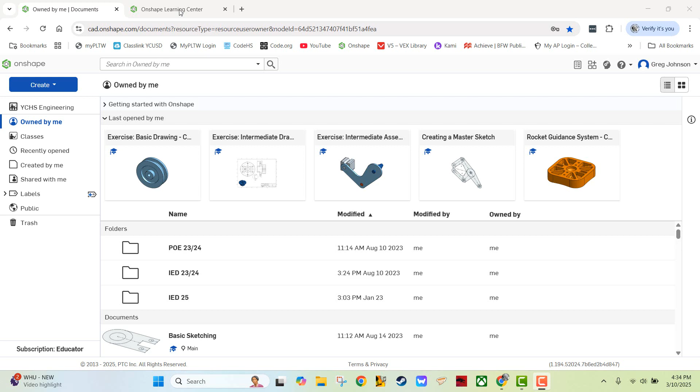First I'm at my Onshape Learning Center and I'm going to go into the new to Onshape pathway. We're going to scroll all the way down to multi-part studios and hit continue.

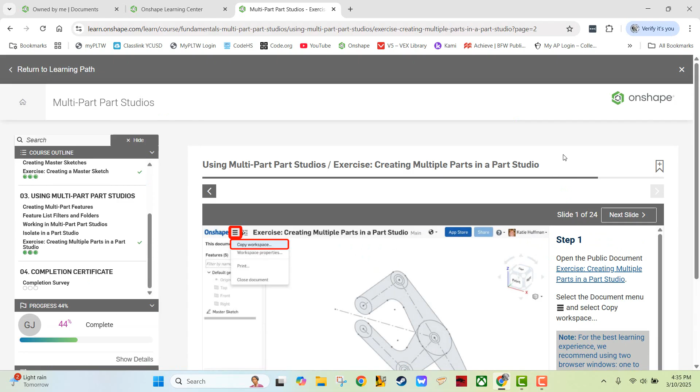This is the exercise we're going to do, under section 3, creating multiple parts in a part studio. This is the thing we're going to be creating from a master sketch, the same one made in the last exercise. I'm going to hit the next page arrow, and you can see we've got this master sketch. Before we had to make that from scratch, but this time we're going to click on this link and it will magically appear.

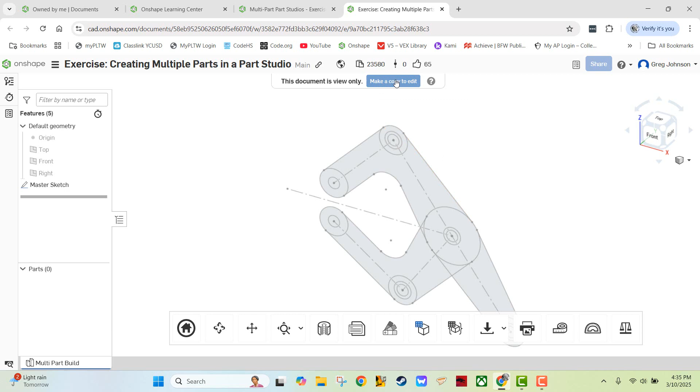Okay, you saw me click the link. Where is it? There we go. Now I have to click make a copy to edit, and I'm going to click on, in my case, owned by me, and make a copy there.

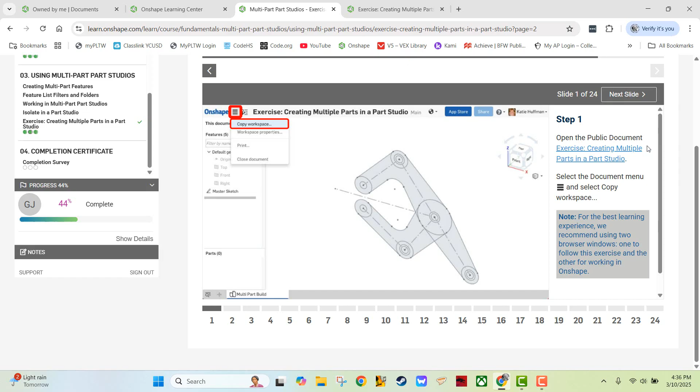Here is that sketch, exactly the same as the one we did before. The idea is this sketch represents a profile for many parts, and we are going to create those parts now. It's all about extrudes and other things like that. Let's go back to our instructions and go on to the next slide.

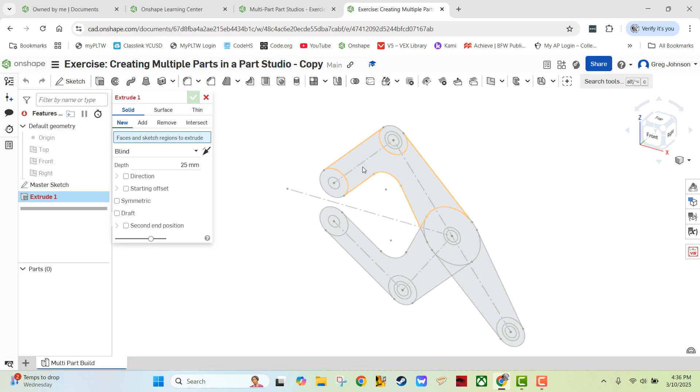The first thing we're going to do is extrude what's called the large arm 5 millimeters in the direction towards us. Looking at it this way, I'm going to hit extrude and start selecting things. I like to select things in order, so I'm going to click here, click here, click here.

Here's a thing that gets a lot of people in trouble. You see how there's kind of a bullseye look in here? We need to get that one in there too, since we need those holes to all be the same size. It might be a good idea to click that first because it's easier to get at. I'm going to keep doing that one, and that one. If you notice we're missing a couple little slivers here, so we better get those.

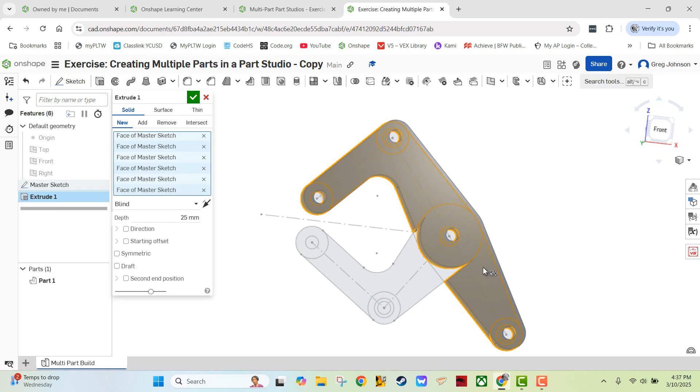Now we got our part. That's way too big, it was supposed to be 5 millimeters, so I'm going to type 5, and there we go. That is our part. The arrow is pointing towards us, and that's what we want, so let's go ahead and accept that.

Now it says rename the part in the parts list large arm. So I'm going to right click, rename it large arm. This process is important because you're going to be creating quite a few parts, and you don't want to have part 1, part 2, part 3, part 4 - that kind of thing will get very confusing. Calling it the large arm, which is what it looks like, is the helpful thing to do.

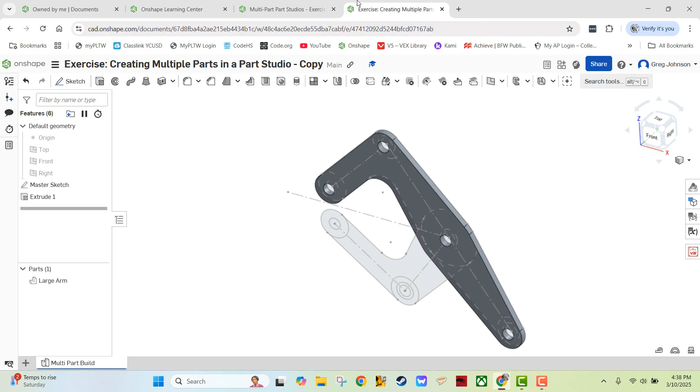Let's go on to the next part. Slide 3 says show the master sketch so we can see it for making additional parts. In this case, it didn't hide the master sketch when we did that, so we don't really have to do that. I'm not sure why sometimes it does and sometimes it doesn't, but in this case it did not hide the sketch, so we don't need to do that.

Let's move on to slide 4. Now we're going to flip it around and create a second part, also 5 millimeters, coming in the other direction. So it's important that I turn it around and make it so I can see it, coming towards me again. I'm going to hit extrude.

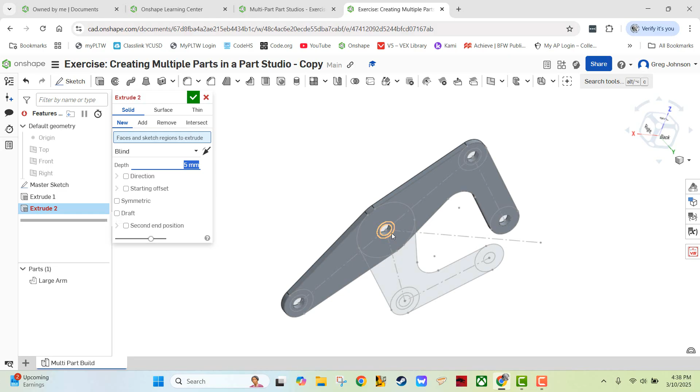This time I'm going to select the 5 millimeters first, then start clicking on things like before. Again we want that inner ring right there, so I'm going to click that first. You notice it's going in the wrong direction, so I'm going to click the arrow to change that, and then start moving my way out.

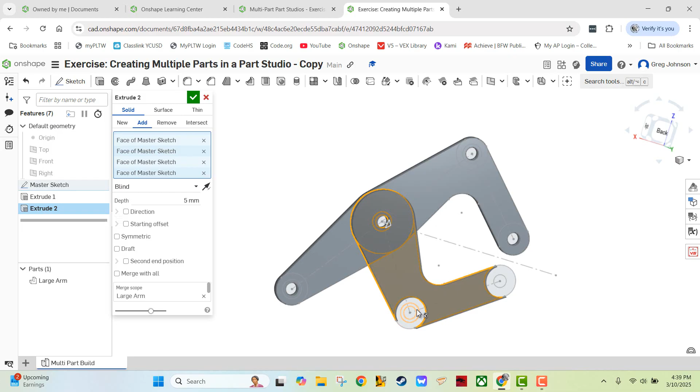Now you notice I missed a little part here, and it's giving me some grief. I'm not sure why at this point. Well, there you go, grief gone. These things can be a little funny sometimes, depending on the order of operations. But if you keep at it, things will work out.

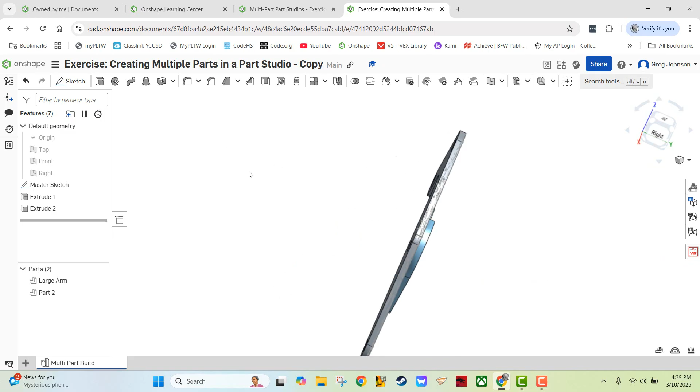Now see how it says add here? It's going to add this to this part. We don't want that, we want this to be a new separate part. So we're clicking new, and we're going to accept it. You notice it made it a different color - every time you make a new part, it will auto-select a new color for it. And there you go.

Now let's go on to the next slide. We are going to make a sketch on the plane that basically sandwiched in between the two parts.

So on the large arm right here, oh, that reminds me, I missed something. We need to go back and rename this part to small arm. There, whoop, small arm. There we go. Okay, got ahead of myself.

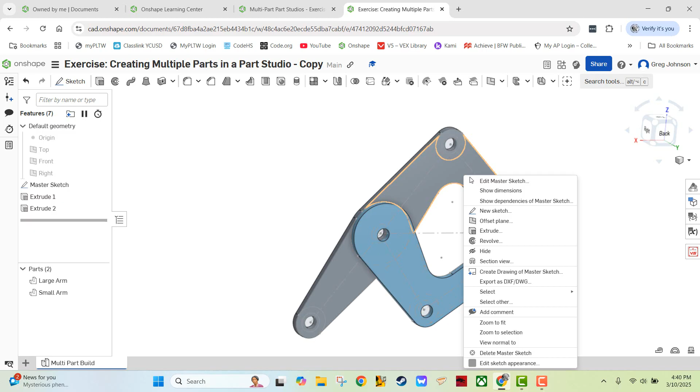Okay, so let's make that sketch plane. I'm going to hover over that surface, right click, and hit new sketch. So now I have a new sketch that's kind of in between the two.

All right, what do they want us to do? They said hide the master sketch. Okay, well, we can do that. And by the way, sometimes things will just start to get in the way. I'm going to hide that master sketch, just for clarity. It's not going to hurt anything at this point, and you notice the sketch has been renamed large arm grip sketch.

I'm going to do that right now. I'm going to click the little pencil, large arm grip sketch. Okay, so let's see what they want us to make.

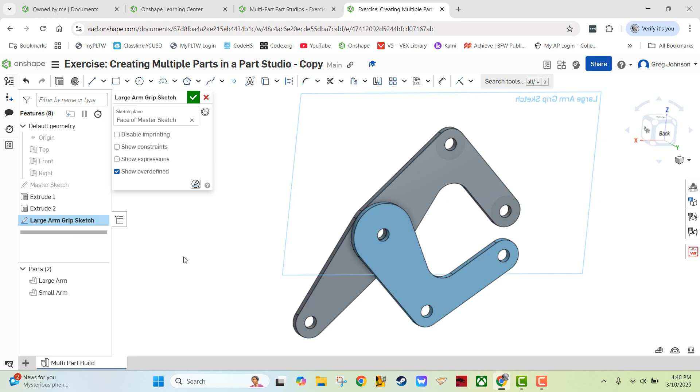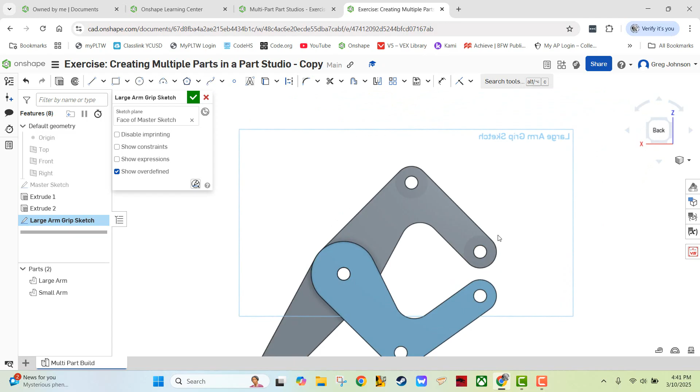So I'm going to go back to my part, and I'm going to hit N so I'm looking in on it. By the way, if you hover over a certain part of the drawing as you're zooming in and out, it will actually focus on that part. If I hover over here, it focuses more on that portion of it. And that's cool, because that's what I want to do.

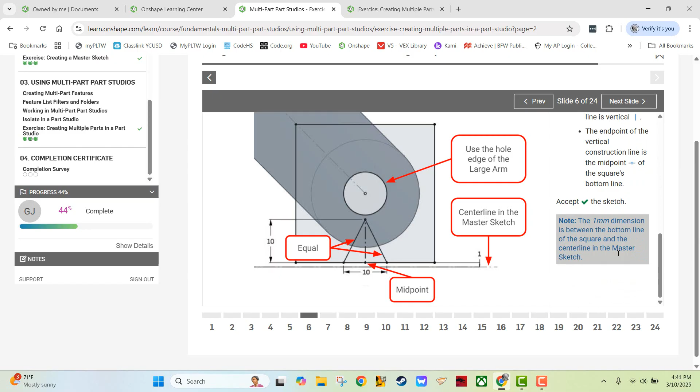One of the things I actually realized is I don't think hiding the master sketch actually makes sense. I don't know, we'll see, because we're going to need that line. So I'm going to unhide the master sketch because we need this line right here in our sketch. So I think they kind of goofed it a bit, but that's okay.

Okay, so the first thing we're going to do is make a center rectangle starting from here and going out. Then we're going to make some lines. And they want us to project this circle into it. That's what the project is. Use the hole edge of the large arm. Centerline in the master sketch. These lines are equal, that's a midpoint. And you notice that's a construction line, and we got a couple dimensions.

And then this dimension. So let's start off by making that center line. Center point rectangle. And I'm going to click and drag it out, so it's approximately what we want.

Okay, now I'm going to go back, I want to see something here. The sides of the rectangle are equal. Yeah, we want this to be a square. And for it to be a square, all four sides need to be equal. Now, in a rectangle, every opposite side is already equal.

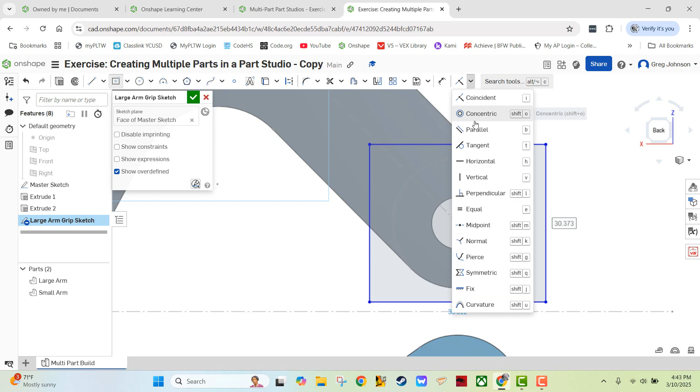So we only need to make equal, say, the top and one of the sides. And then that will form it into a square. Now, if I want that square to go black, this is the key dimension right here, this 1 millimeter dimension from the center line.

So I'm going to get my dimension tool, click here and here, go out and make that 1. And you notice it went black.

Okay, so now I'm going to create this center structure. It's just a triangle that's 10 wide and 10 tall. Okay, and let's go ahead and let's do that.

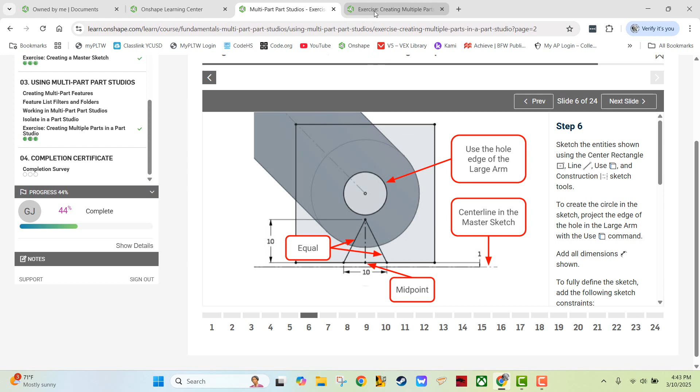So I'm going to start with the line. Now, by the way, they said they want this center line to come up as a midpoint. Well, you're going to notice it's also straight down from there. There's multiple ways we could do this. I'm going to click to start the line, and you notice when I get here, I'm creating a vertical constraint. I actually want that, so I'll click that, come back down here, and double click and end it.

Then I'm going to turn it into a construction line, start right here and go straight down. And if you notice, it lines up with the midpoint, so I didn't need to add the midpoint constraint afterwards. That's what I got by lining up with that point that's the center of that circle. Now I also need to project in that circle right there.

Oops, I made it into an accidental construction line. Is that the end of the world? No, because I'm going to hit escape to get out of my tools. I'm going to highlight my construction line and deconstruct it. And there you go. Remember, nothing is a fatal error. You don't always have to be hitting the undo command. You can actually just fix it.

Okay, so how am I going to make this thing look like it's supposed to and make it black? Well, first let's add some dimensions. So from here to here is supposed to be 10. And this line is supposed to be 10.

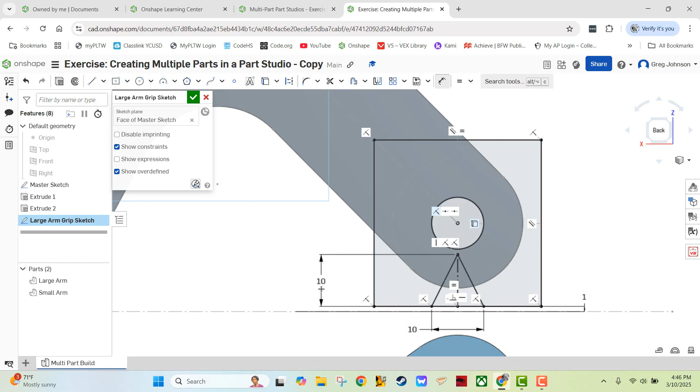I'm going to click that and delete that. Okay, we do not want that line tangent to that circle. But what we do want is for this line to be 10. Now we got what we want. Okay, so see, even I make accidental constraints at times.

So there it is. Okay, so that's the sketch we want, the large arm grip sketch. I'm going to accept that. Now we're going to go back to our instructions, and we're going to go on to the next slide.

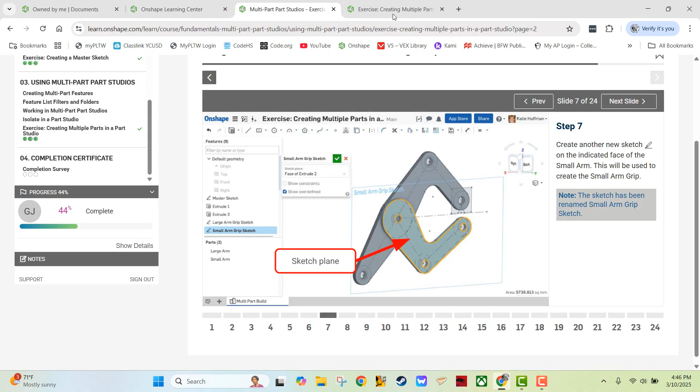Okay, this time we're going to make another sketch, but instead of making it on that sketch plane that was the face of the large arm, we're going to make it on the near face of the small arm. So we're going to create another sketch. I'm going to zoom out a little bit, and drag this over so I can see a little better what I've got. I'm going to hover over the near face of the small arm, right click, and say new sketch.

Okay, so what is this sketch? Well, let's see. Oh, rename it small arm grip sketch. We can do that. Let's do it right now. Small arm grip sketch. All right.

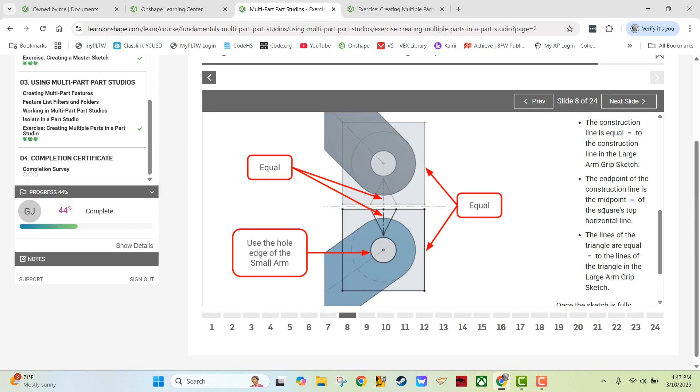Next slide. Oh, look, it's a mirror image of the other one. That's kind of fun. Okay, to create the circle, we're going to project it, and we can actually... that's funny. They're kind of doing it in a way that I consider to be not necessary. We could do this so much easier than they're describing it.

You know how? Because we know about the mirror function in the sketch. I'm just going to go, well, first I am going to, well, no, I'm just going to use the mirror function. I click mirror, I click my mirror line. Oh, okay, never mind. I thought I was going to be able to pull things from another sketch. Well, that just goes to show you that sometimes I don't even know what I'm talking about.

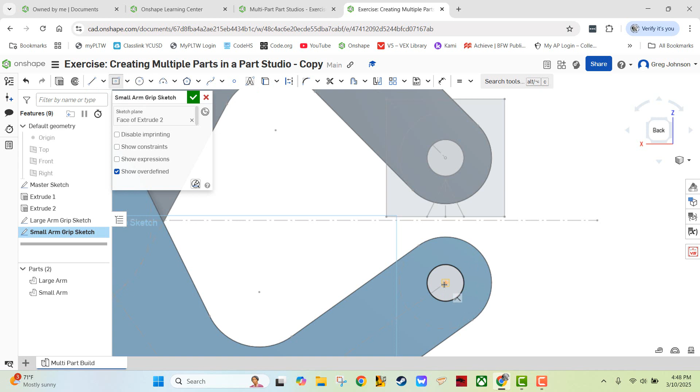That seemed like a cool thing to do, but apparently we're not going to do that. Okay, fine. We'll do it the other way. We'll click the use, we'll pull that in, we'll get our center point rectangle. Now I am going to do something. Well, let's see if I drag this out here, if I can reference that point. I really can't reference that point.

Okay, fine. So we'll click it. And I thought maybe I could reference that and do a vertical constraint, an automatic vertical constraint, but I could not. But it does say we can add an equal, which that's just kind of interesting. So I can do an equal constraint between those two and these two, and that pulls it in.

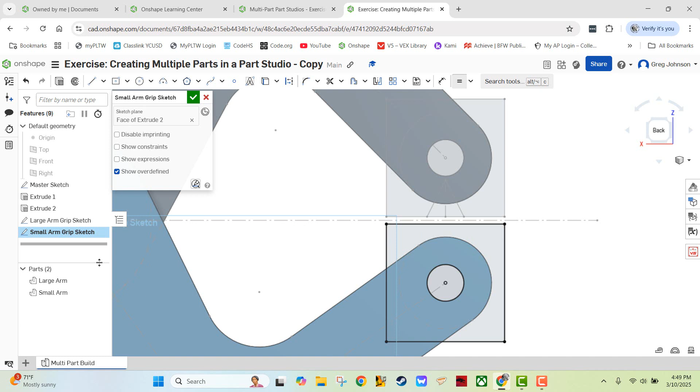Okay, so interesting. Okay, so by the way, I'm going to hide the large arm just so we can see that sketch a little better. And I'm actually going to hide the master sketch too, because this is just going to make my life a little bit easier in mimicking the other one.

So I'm going to get my line tool. I'm going to click, and again, see how I create, look at it. If I click right then, I'd get a perpendicular to that other line. Do not want that. I don't want yellow. I really don't. Now, I don't mind actually that coming down from coming straight up from that center point, because that's actually helpful, but I don't want to keep going till more yellow starts.

See how that happened? Don't want that. So I'm going to click, come back here, double click, and now I'm going to turn on the construction tool. I'm going to start here, go straight down, double click, and finish that. And if I make this and this equal, look how that squared that away.

Now I believe I just need to do, I wonder if it'll allow me to do a vertical between that point and that point. Yep, see how that locked it in. Okay, so you can do constraints. What apparently you cannot do is do mirrors between two sketches. So that's cool, now we have our small arm grip sketch.

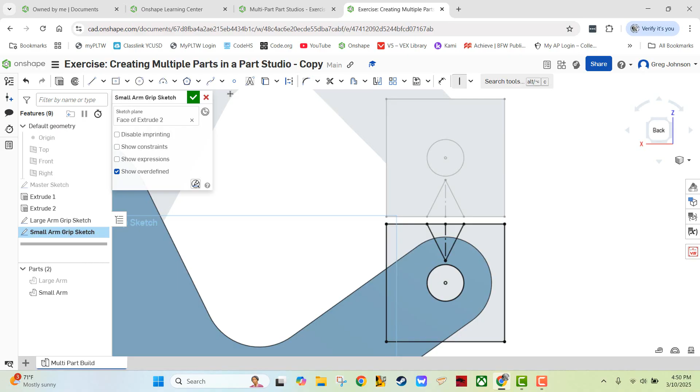Let's accept that and move on. Next slide. Okay, we're going to flip this around and we're going to create a plane. Okay, so let's go back here. By the way, the easy way to flip it around is to go and tell it we want an isometric view. Notice that? Oh, probably should bring large arm back too. There we go. And we're actually going to hide these two sketches. We don't really need to see them right now, and we can always bring them back.

And we are going to create a plane that we are going to name the mid plane. We're going to offset it 25 millimeters from the near face of the large arm. So let's do that. We're going to get the plane tool. Where are you? There you are. Entities. I'm going to go from here.

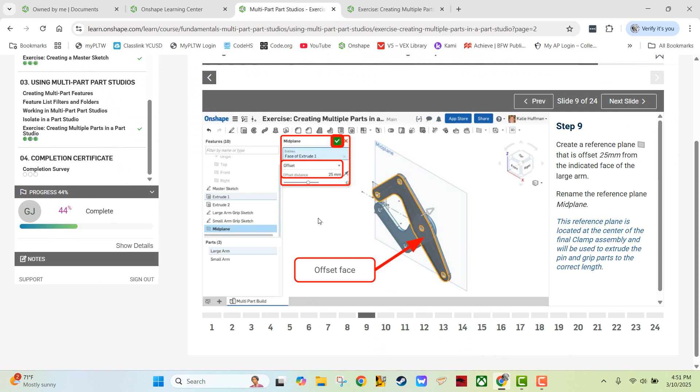And by the way, even though it's called midplane, we actually want an offset plane. Offset just means I'm going to pick a plane, and I'm going to make a plane that is perfectly parallel to that plane, and then offset by a certain amount. Now, if you notice, the arrow is pointing in the wrong direction, so I'm going to flip the arrow, and I do believe it was 25 millimeters. Yep, so we got exactly what we wanted, except we're supposed to name it midplane. So let's do that. Midplane. And we got the plane we want.

What's next? Some more extrusions. Now these ones are a little complicated. What we're going to do is we're going to create some pins. And in order to do these, we were going to use the master sketch. So we got to be able to make sure we can see the master sketch.

And then we've got two extrusions actually. We're going to go, because the master sketch is on the back side of the large arm, we're going to extrude in one direction out to our midplane. And then we're going to also extrude back in a second direction. See these double arrows there? That indicates the second direction back up to this face.

Okay, now it's confusing because what it looks like right here is that you're only extruding that ring. It's not true, we want to actually extrude the inside too. You can't tell that by looking at that, but we want to make a solid. If you look over here, it's solid in the middle, which means we have to accept all of that. So we're creating new parts.

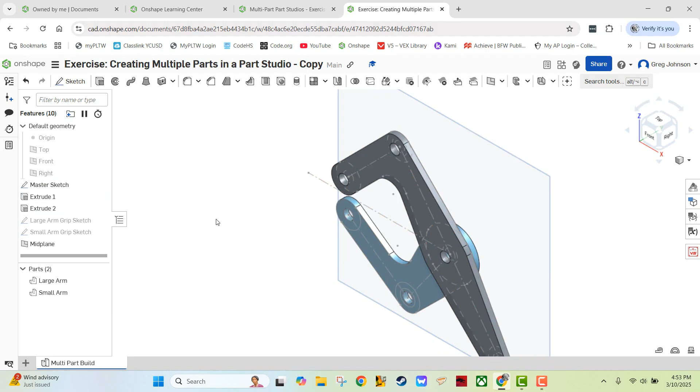We're going to select those four faces. We're going to make the first face up to the midplane and the second face up to this face. Now let's go do that. Now, one of the things that is true when we bring that master sketch back is that it's hard to see where we're supposed to click. So what I'm going to do is temporarily hide the large arm.

And then I'm going to hit the extrude, and I'm going to extrude here and here. And if you notice, they're in the wrong direction. I'm going to go the opposite direction, change it from blind up to face, and select the midplane. Now I'm going to click over here and here. And why is it being a jerk?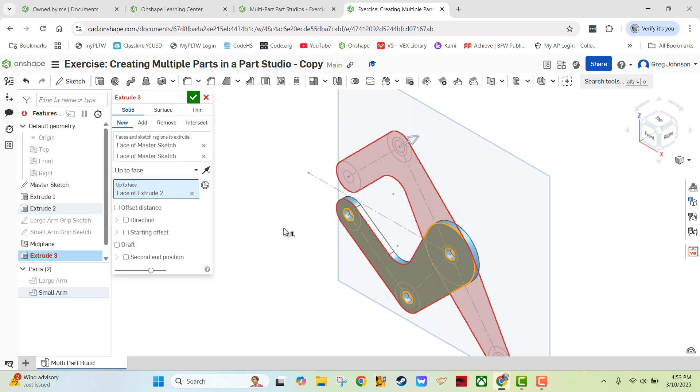Okay, my bad, that was terrible. I should have selected everything before I did that. Let's go back to here and select those other two. We were not focused on the same spot. Now I'm going to do up to face there, and then you can see that we've got what we want.

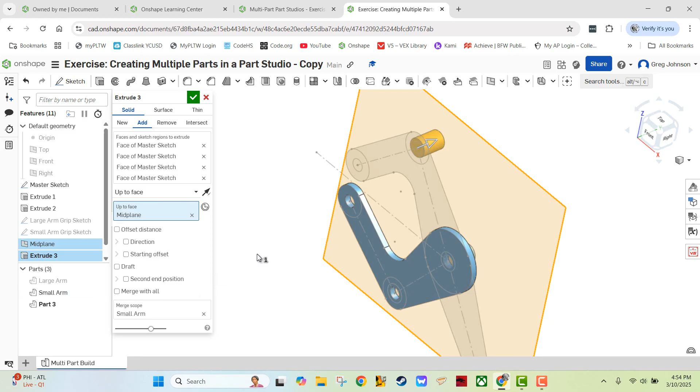Now the weird thing is, because of the existence of this part here, it almost looks like it did something different. As a matter of fact, we can't even see it, but don't worry about that, we're doing fine. But we are going to select the second end position, it's also going to be up to face. And if you notice, the arrow's pointing in the right direction. Now, what face is it up to? Well, I got to unhide my large arm now because it's up to this face. Okay? And that's exactly what we want. We're going to accept that.

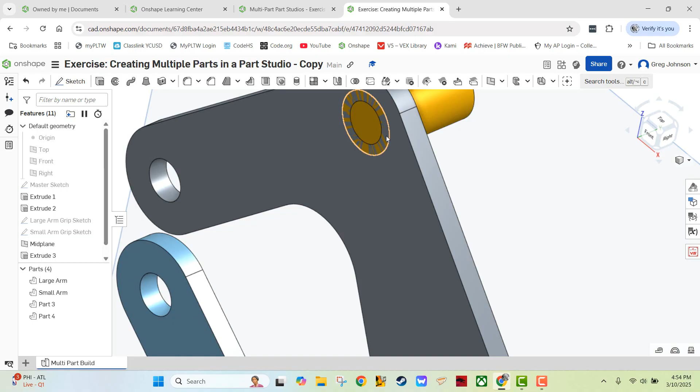Now I'm going to hide the master sketch again so we can make it look like it's supposed to look, which is, well, they kind of show it over here, but that's what it's supposed to look like. One of the things you might notice is there's some weird yellow and gray mix here. We actually extruded this part through the other part. That doesn't sound like something we want, and we are going to correct that later. So if you're worried about that, don't worry about it, we are going to fix that. But for now, it does look kind of weird, because it is.

Okay, so what are we doing next? Next, we'll use the master sketch to create the 3 different pins. Wait, is that what we already did? That is what we already did. I'm sorry, we're on step 11. To model the 3rd pin, this one down here, we're going to create a new extrude feature.

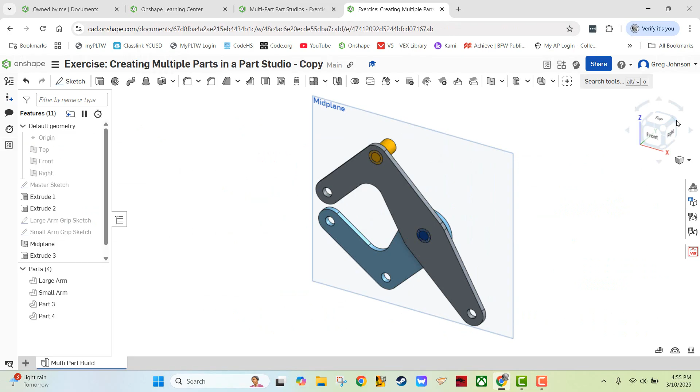We're going to select the medium circles, basically the same 2 circles we had before. And we are also going to extrude it out to the midplane, but we are going to flip it around. We want to look at it from the different side. So I'm going to flip it around, and I'm going to zoom in down here.

And I need to unhide the master sketch because I need that. Now again, the problem is the master sketch is on the other side of this part. I'm going to hide that. I'm going to start my extrude, and again, I'm going to click add first so I don't forget. And I'm going to select those 2 things that I need. And they're pointed in the wrong direction, so I'm going to click the arrow to make it go in the other direction. Change it from blind to up to face.

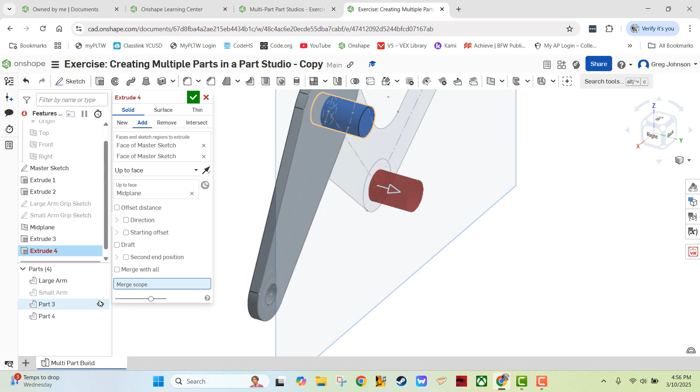And then I'm going to select my plane again. And I'm going to unhide my small arm again. Whoops, oh, I'm sorry, I didn't mean to click that, I meant to click the eye. There we go, there we go. Oh my goodness, we got that. And merge scope, it is not add. See, when I did that, it changed it back to add. It has to be new, we want a new part.

Okay, and let's make sure that's all we need to do. Pretty sure that's all we needed to do. And that's it, we're going to call that the small arm pin. That tells me that I probably should have renamed parts 3 and 4 something else, so we'll go back and figure that out. Let's name that small arm pin. Actually, we don't need to rename the extrude. Let's make that extrude 4 again. We need to name the part.

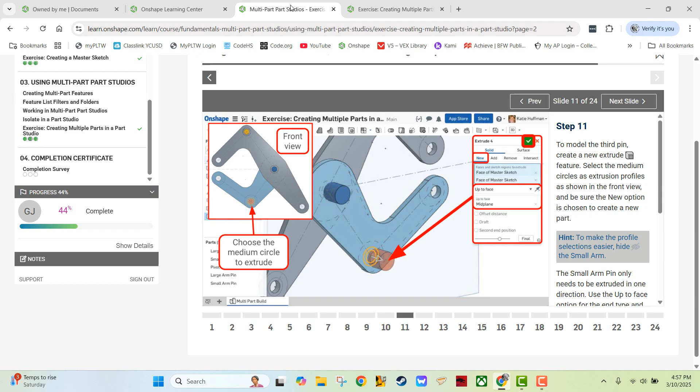Okay, so we're going to accept that. This is the small arm pin, rename it. And what were those other ones supposed to be called? Pivot arm pin, I think. Well, let's go back where we can actually see that. Boy, they're hiding it pretty good. They hid it, let's see. They're going to tell us what it's called down here somewhere.

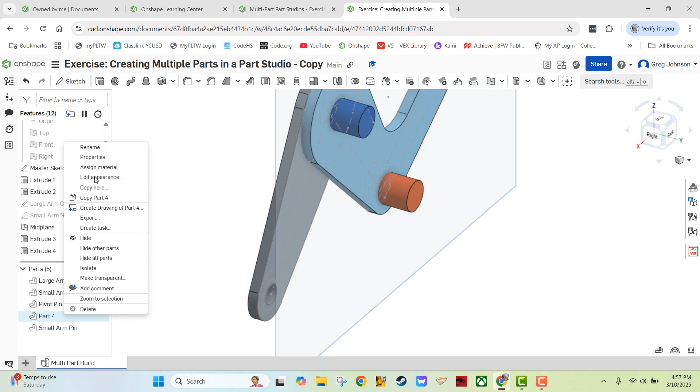Okay, large arm pin and pivot pin. There we go. So part 3 is the pivot pin, because it's where the thing pivots. Right click, rename pivot pin. And right click, rename large arm pin. Okay, now we got everything looking the way we want it.

Okay, let's fast forward, so we did step back a little bit. This is where we're going to fix that issue that we had before, where we extruded right through the middle of the parts. So we're going to do this thing called a Boolean. If you want a little background on this, Boolean is basically the words and, or, and a couple others, but and/or is good enough for us now. When we can basically cause parts to take away from other parts.

So what we're going to do, the way I'm going to explain this, is we are going to subtract from the large arm pin, the small pivot pin, and the small arm pin, everywhere they intersect with the large arm and the small arm. So that's what the tools are, those are the things that are going to cause the subtraction to happen. So it's kind of an and - anywhere that these things and these things run together is going to get subtracted. And keep tools, yes, because we don't want those 2 arms to disappear. Okay, so let's go and try to do this.

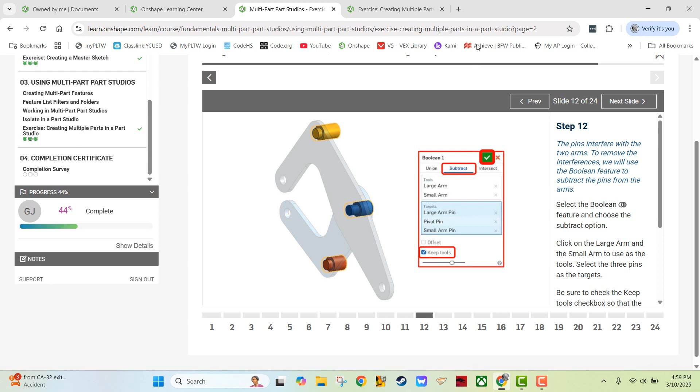So first of all, I'm going to hide the master sketch. I'm going to right click and flip back around to my isometric. I'm going to hide the midplane too, I don't want to see any of that stuff just for now. Zoom in a little bit, and let's get the Boolean feature. Here it is, it looks like one of those Venn diagrams.

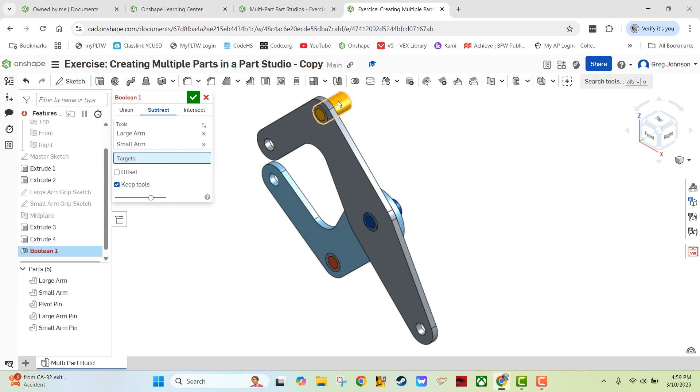Make it subtract. Now the tools, these are the things that they're going to intersect with, and that's the large arm and the small arm. The targets, the things we're going to subtract from: this pin, and this pin. And you notice - oh wait, what happened?

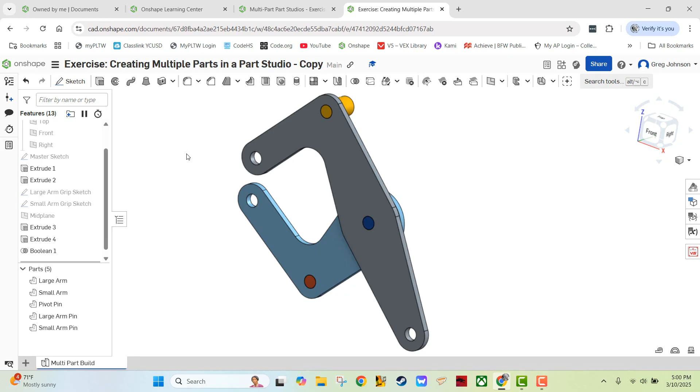There we go, I don't know why it didn't take. Okay, and you notice our little funky things disappeared. So when I click that, look at that. Now if you were to hide the arms, look what it did to the pins - it took off the intersection between the pins and the arms. Pretty cool.

Now we're going to create our grips, and the grips are going to be created from those 2 sketches we made. If you notice, these are also new parts. We're also going to extrude them up to the midplane. So let's go ahead and do that.

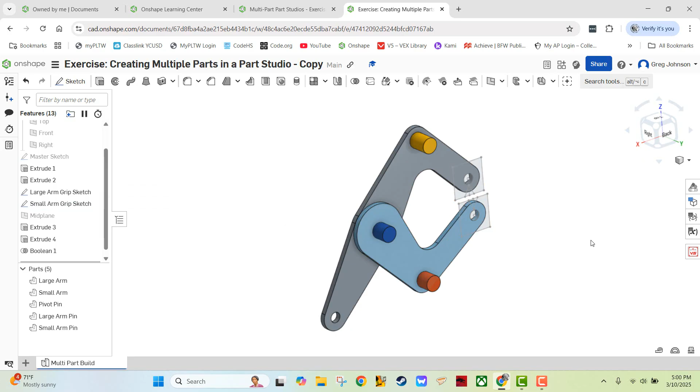By the way, there's a lot of different things you have to select to make that happen. So let's go back here, let's flip it around so we're looking at the back side again. I'm going to hover it a little bit more. Now we need to bring those sketches back so we can see what we're actually extruding, and I'm going to zoom in on it a bit. We're also going to need to bring back the midplane because that's what we're extruding up to.

Now I'm going to show you, there are some very common issues that happen when doing this, and we're going to show you how to avoid those. So we're going to do an extrude, keep it as new. We're going to say up to face, and the face is going to be this plane here.

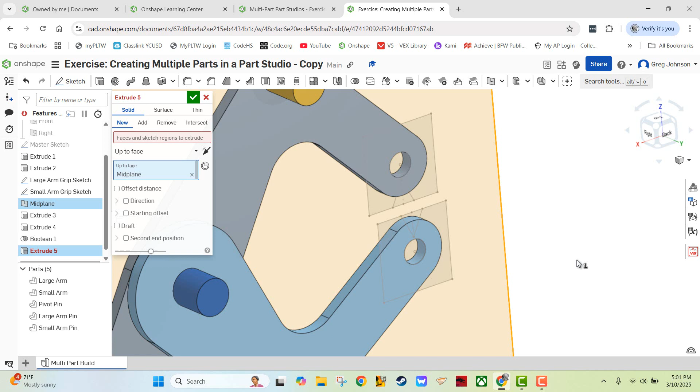Okay, now what are we going to actually extrude? We're going to extrude that, and the center hole - oh darn it. I see, that's the problem, I did it in the wrong order. Let's do that center hole first. And it flipped it around, so we're going to unflip it.

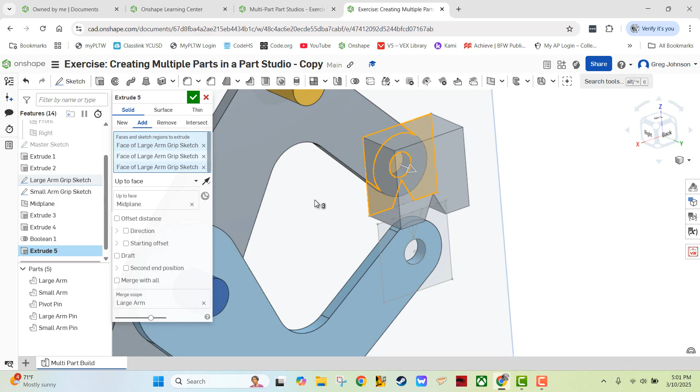Now you got to get 3 different things, okay, including the center hole. The mistake that a lot of people make is they don't include the hole. So let's start with the hole again, and then get all the little parts that add up. In this case, we had to do 4, so a total of 7 things. Everything else looks good - they are new parts, and we accept them.

Now, you may notice they're not the same color. Doesn't matter, doesn't matter. I don't know what the protocol is for what color it chooses to make things when it makes new parts, but it's definitely not any colors that already exist - it seems rather random to me. Not a big deal. Okay.

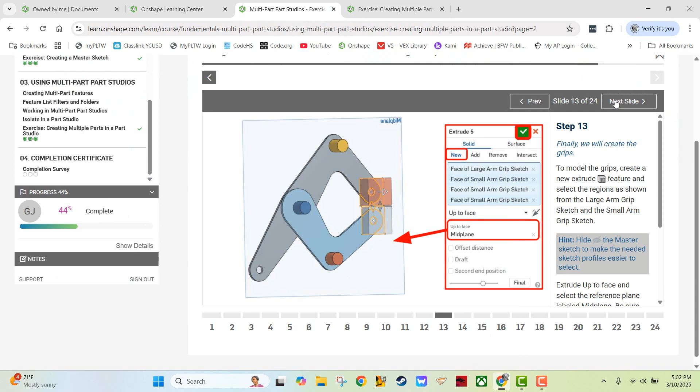What's next? Well, you know how we had pins in the other, and we had little extensions of the pins that stick into the arms. We're going to do the same thing here, but with separate extrudes. Part of that is because these sketches don't appear on the same plane - or actually they appear on the same plane, but they don't extrude to the same face. This pin here is going to be shorter than the other one because it doesn't have to go through as much. So anyways, let's go ahead and do this.

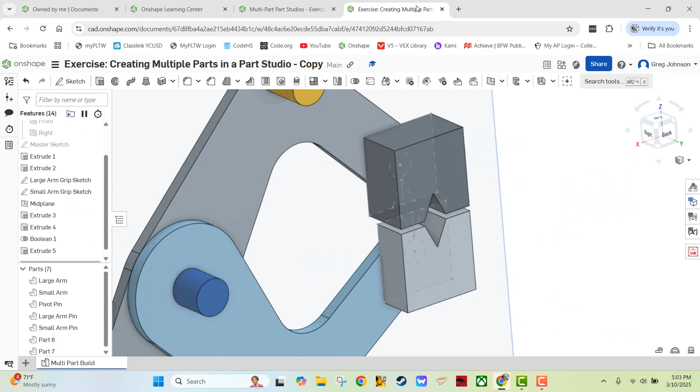This time we are adding it - we're adding it to the grip that we have, and we're going to do up to face, which is, in this case, the back side of the large arm. So let's flip this around, and I can easily do that by right-clicking and hitting isometric. I'm going to zoom and drag in over here.

I'm going to hide these sketches because we really - well, no, actually we kind of need those. Don't listen to me, we're probably going to need those. So I'm going to get an extrude, I'm going to make an add, and I'm going to see if I can click that circle in the center. Yep. And then I'm going to do up to face, and I'm going to click the face, which is this. And there it is, okay.

And it doesn't show it, and that's unfortunate. Well, I think it's because it says, what do we want to merge it to? That's what the merge scope is. I want it to merge to that thing. Okay, but it still doesn't show it. Okay, don't ask me why.

Oh, and I can already see I did a boo-boo again. That's okay, I'm going to accept extrude. What was the boo-boo? I didn't rename these. So this is the large arm grip, and that's the small arm grip. So let's rename those.

Large arm grip. Right click, rename: small arm grip. Okay.

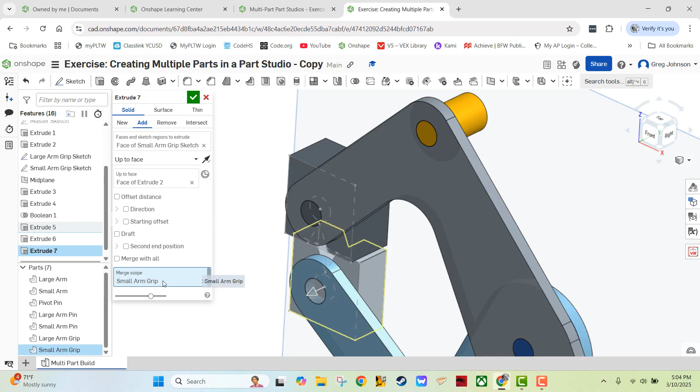Now we're going to do the same thing for the bottom grip, or the small arm grip. I'm going to click right there. It's going in the wrong direction, so I'll correct that by clicking the arrow. We're going up to this face, and we're going to merge it with the small arm grip, which is what we wanted. I don't know why I didn't do it the other time, but sometimes this thing's a mystery to me. And there we go.

Okay, so let's do an isometric view to see what we have so far. Looking pretty cool. What happens next?

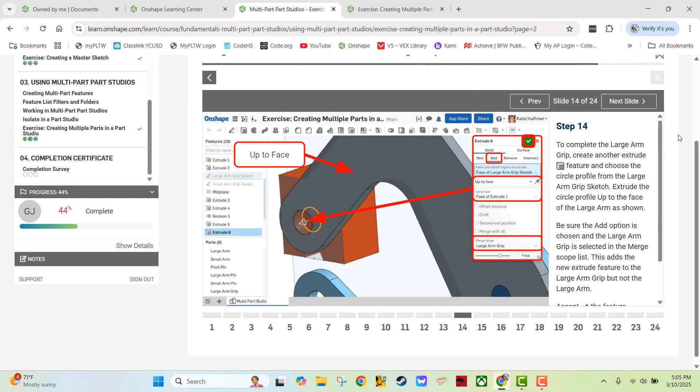Okay, this is me jumping ahead. We already did slide 15. We're going to flip it around and do a part mirror.

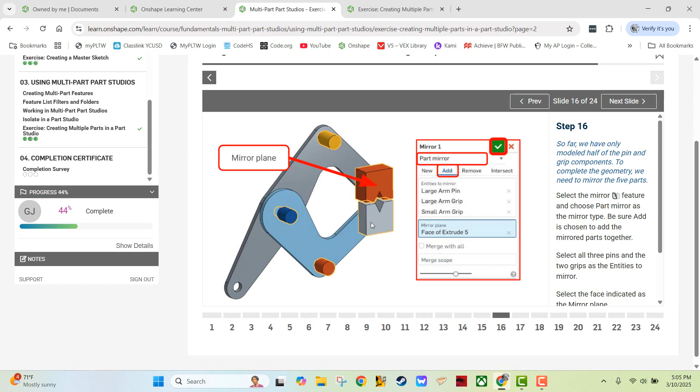We're going to mirror all 3 pins and both grips, and we're going to add them because we're adding the mirror to the existing parts. The mirror plane is going to be the face of this extrude. By the way, we could have done the face of any of these and it would have done the same thing. Very important though, part mirror.

So let's go back and rotate it a bit so we can see what we're looking at. By the way, we can hide the midplane at this point. So we are going to mirror. It's already on part mirror, that's good, but we do have to make it add.

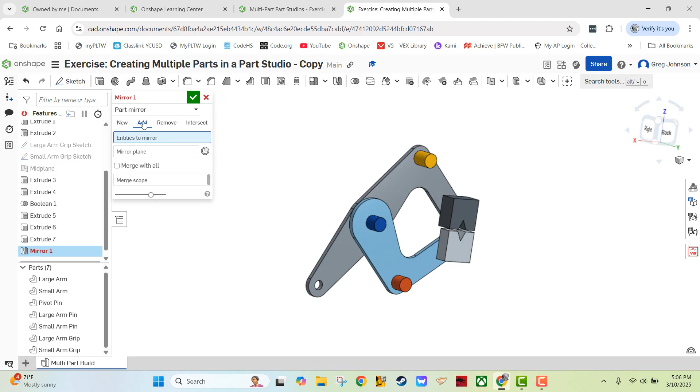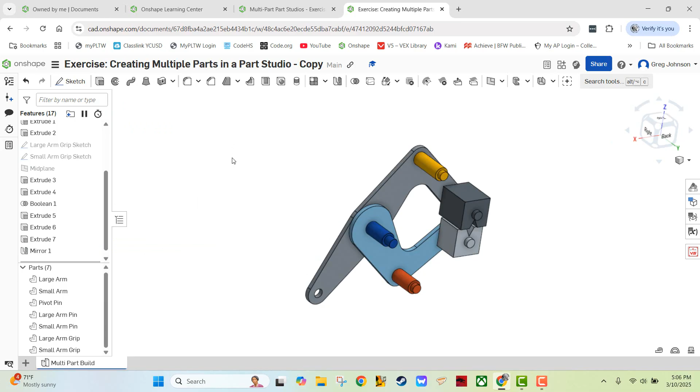The entities to mirror are the 3 pins. By the way, you could have done that same thing by clicking their names down here, but I find it easier to click on the drawing itself. And the mirror plane is going to be that. Look what it did, and I'm going to accept that. So it basically made these things symmetrical. Isn't that cool? All right, what's next?

At this step, your model should look similar to the image. Yay, it does. All right, slide 18.

We're going to add some fillets. We're going to do 2mm fillets around all the exterior edges, the front to back edges, and then the one that's kind of at the apex of the V, or the vertex of the V. I don't know, apex, vertex, don't ask me. Okay, so we've got 10 edges to fillet.

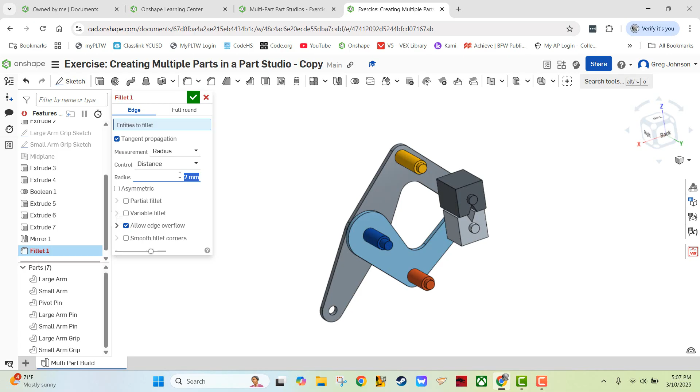So let's get the fillet tool and set it to 2mm. I like to set the size first on fillets. Sometimes it can cause problems if you don't.

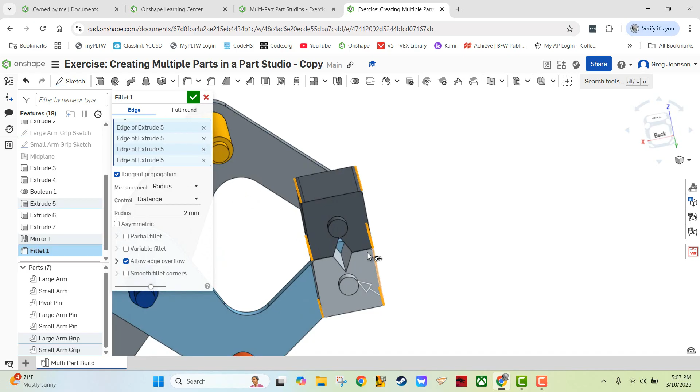And I want all these front to back edges. We are definitely going to have to do some rotating to make that happen. I'm going to flip over to the other side so I can get that one and that one and that one, and then we got to get those ones on the inside. So I might have to rotate it so I can see that one, and rotate it so I can see that one. Those are the edges we need. I'm going to accept that. And there it is, looks cool.

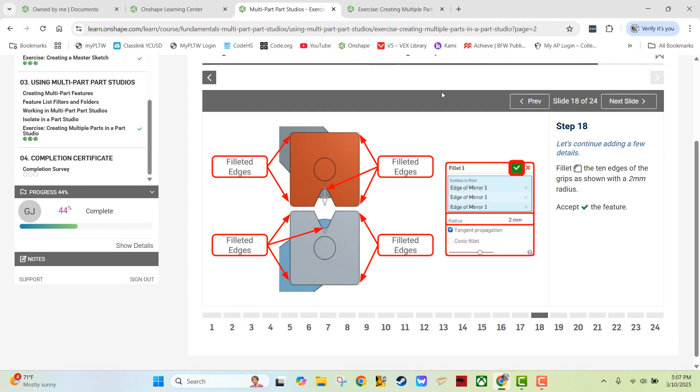I'm going to select, by the way, if you want to select all of them, you can click on them individually, or you can hold down Shift, click the last one, and it'll select everything in between as well. So did we get them all? Yeah, we got them all.

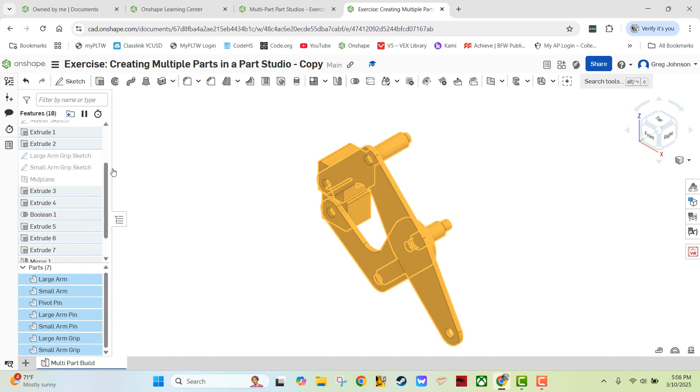Now I'm going to right click in here and say Assign Material for 7 parts. And I want aluminum, I'm going to type AL. Okay wait, I'm sorry, no, you click - it's weird, you actually have to click where it says none, then you can type in. And it was aluminum 1060. By the time you get to ALUM, it pops up. And then I'm going to accept that.

So now I've added a material to them. If in the real world, that means we would be actually machining these out of aluminum, which is a very common thing. On to slide 20.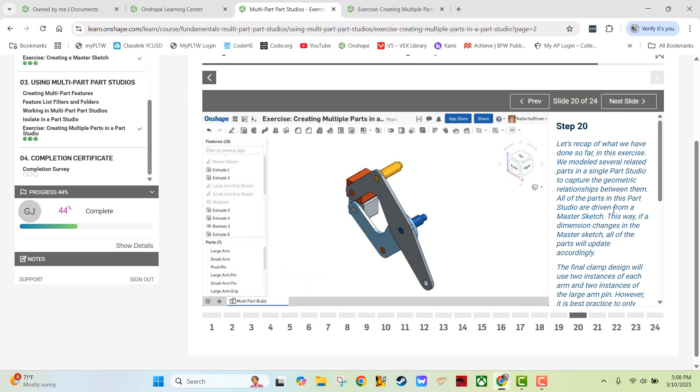Let's recap what we did - a bunch of stuff, yay. Go on to slide 21.

Now this is kind of fun. So one of the things this is showing us is that once you get to this point, you've created this beautiful portion of a clamp, right?

Now, what if we wanted to make some changes after the fact? Does that mean we have to start over? No, no, no, we do not have to start over. What we can do is go back and change some relevant sketch dimensions and create something that is modified.

Let's say we were a company manufacturing these and we wanted to make them in three sizes: small, medium, and large. We're not learning how to do this right now, but we could actually make these things called versions, starting from the same one, making a second version that was bigger and another that was smaller. But here we're just altering the one we have. There's a lot of flexibility in this.

The cool thing is, all I'm going to do is alter some dimensions on my master sketch, and everything else will stay not broken. Now, let's make some design changes.

Okay, so I wish they told you which ones you had to change. You don't have to change them all, just a few of them. The ones we're changing include this big one here, this radius, and I think that's it, I don't know. Let's find out. So I'm going to right click here and say hide all parts.

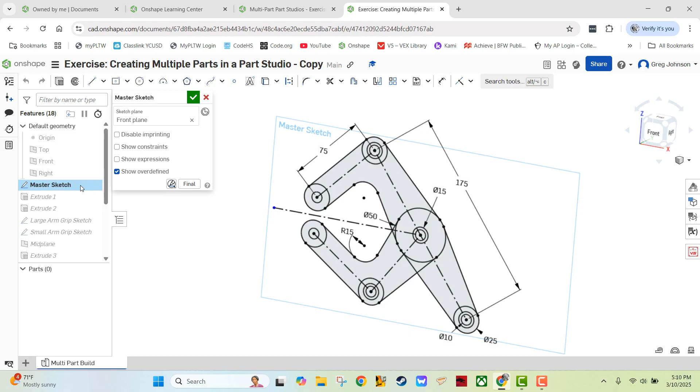And then I'm going to unhide my master sketch. Come on, master sketch, oh there it is. I'm going to double click it to edit, and hit N to look at it. Okay, so actually I was wrong, there's more things that got changed. So let's go back and compare.

By the way, I like to fix the biggest one first because it usually scales the whole thing if you do that. See, this one goes to 300, let's do that first. Now, to change a dimension, you hover over it and double left click, and then I'm going to type 300. And boy, did it cause problems, didn't it?

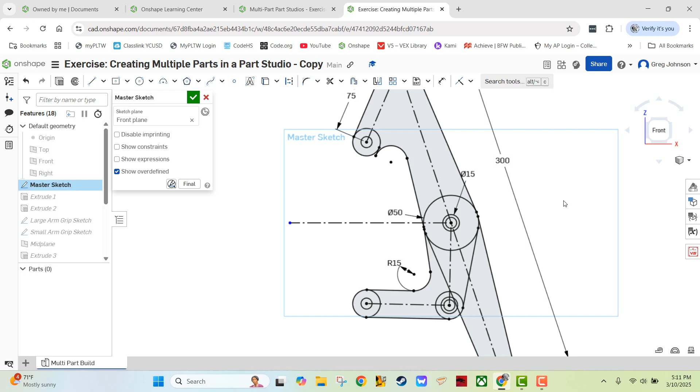Okay, so maybe I was wrong about that. But I think if we just keep doing dimensions, cool things will happen. Let's make that 125, maybe I got that backwards. Maybe we should have gone from small to large. I'll have to try that sometime and see if that makes it better.

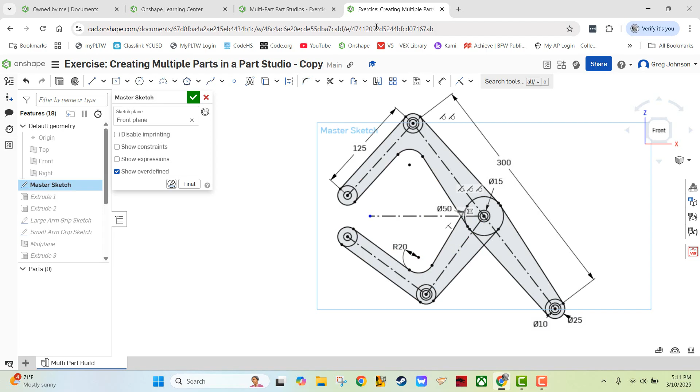What else? I know this radius is supposed to be 20, so I'm going to change that to 20. Let's see, the circles don't look right, so 75 and 25 and 15 on this one. 75, double click, 25, and the inner one, double click, is 15.

And then I seem to recall that these ones were 45, so let's fix that, 45.

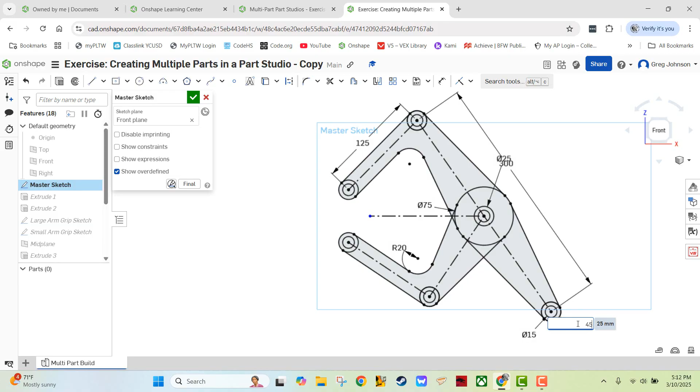Now it looks good. I was thinking that in cases where you're still creating a sketch, it makes sense to go from smallest to largest in an already fully dimensioned sketch. It's when they're undimensioned and you just want to change some things, because maybe you sketched way under proportion, that you'd want to go from biggest to smallest. Because if it's not fully constrained, it will scale the part. But if it's fully constrained, that makes perfect sense that it wouldn't do what I was hoping it would do.

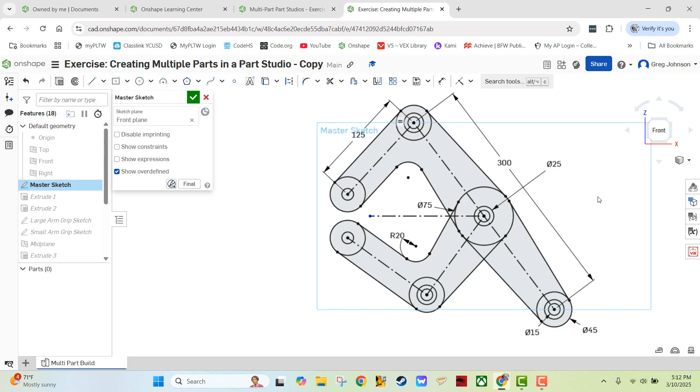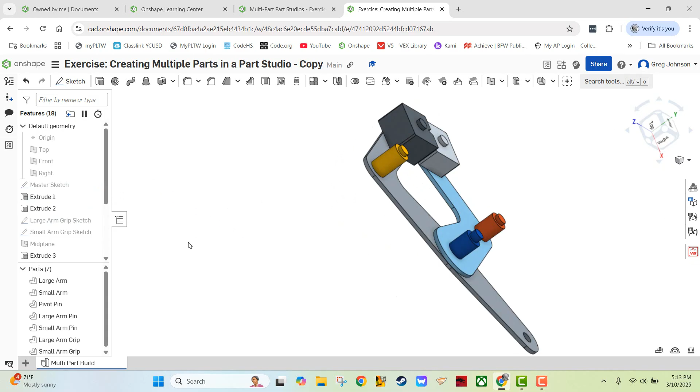All right, so there we go, let's accept that master sketch. Now this is the cool part, watch what happens when we create visibility for our previous parts. You notice we didn't have to redo the whole thing, not at all, we just have a bigger clamp. So cool, so we have the basic same look and design, but a bigger one.

And like I said, if we were in the business of making clamps in multiple sizes, making our next size took under 5 minutes, right? Pretty neat. Okay, so next slide.

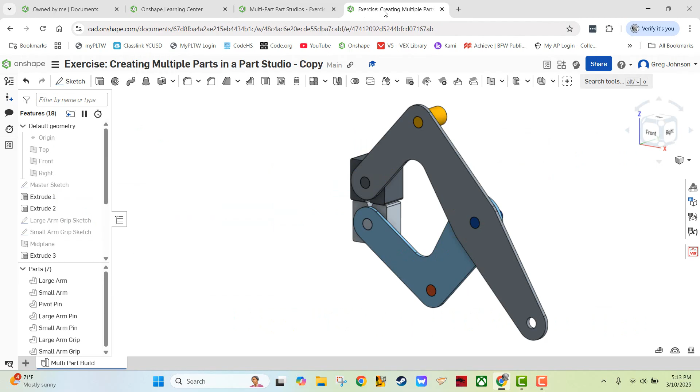Oh, but we got to change the midplane, so we're not done. Let's go back, unhide the midplane, double click it and change it to 35. Kind of makes sense, though, if we're going to make it bigger in those dimensions, we're going to make it wider as well. And look, just by changing the midplane, we made the whole thing wider because the mirror is still based off, all it did was extend the extrudes out here.

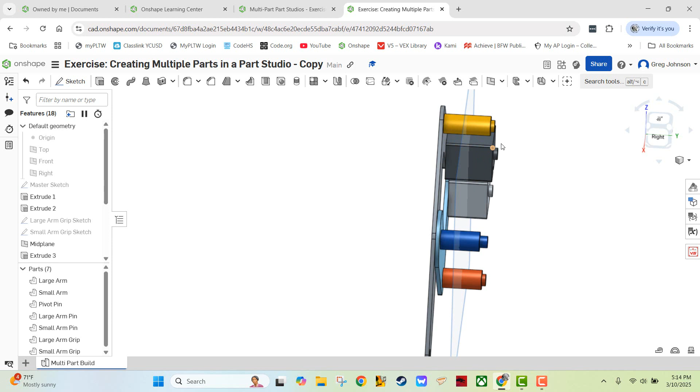The mirror was still based off the face of this guy. By just changing a few dimensions, we created a very similar but completely different size part without breaking anything. Okay, so there you go, we made all this starting from one master sketch.

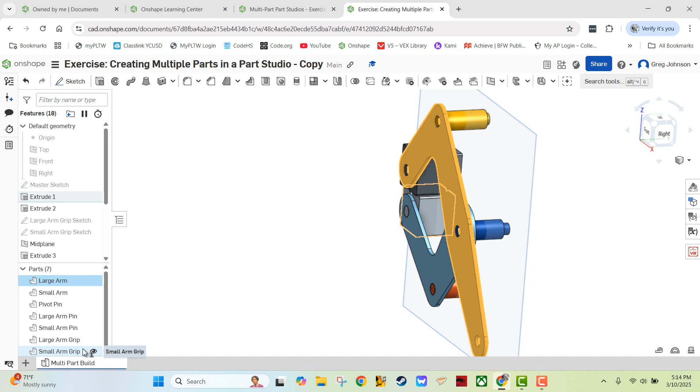Now they want us to do all this stuff, and I suppose we can, so we should. Let's go and select all our parts again. I'm going to click the top one, hold down Shift, click the bottom. I'm going to look at the mass properties, and this thing is 1.635 kilograms. I come over here, click next page, begin the self-check, 1.635 kilograms, and we got it.

All right guys, that is creating multiple parts in a Part Studio. Thanks for joining me.